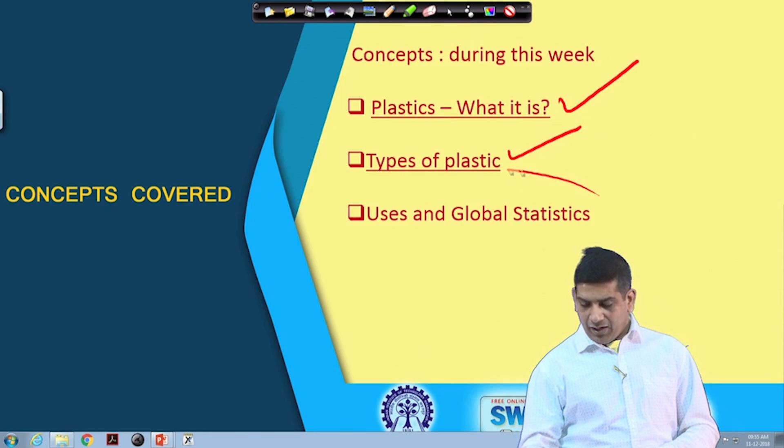Just to recap the concepts we are trying to cover this week: the first two bullets, which are underlined, we have already taken care of. We already talked about what is plastic, and we also looked at the types of plastic. Today, in this video and the one after, we will focus on usage and global statistics.

So let's get started and look at the use and global statistics. What are the major fields where plastic is used? I have told you in the last three videos that plastic is basically used everywhere, but where is the maximum quantity of plastic being used?

Plastic is used in automotive, electrical, electronics, and consumer goods—all sorts of different items that you and I buy. Medical devices—go to any hospital today and you see a lot of plastic related stuff. Construction industry uses a lot of plastic in construction and in tools aiding construction activities. Packaging material uses lots and lots of plastic. If you buy anything from online shopping, or go to any mall and buy lab equipment or other stuff, you see lots of packaging and plastics used there.

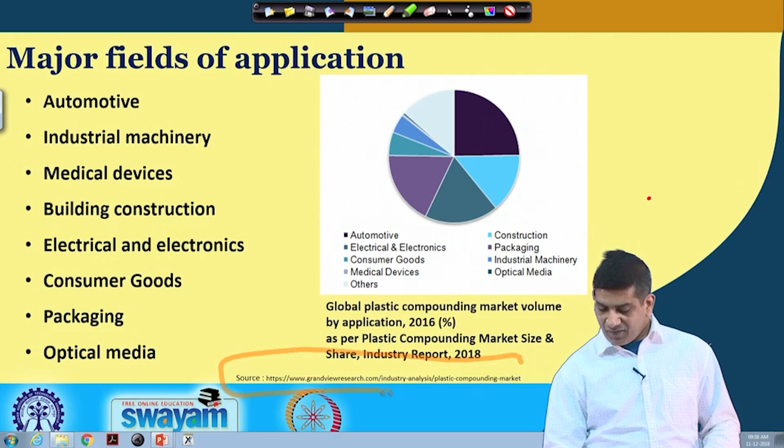The reason for putting this link is twofold, and students here should definitely do it, because this is not my data—I have taken it from somewhere, so I have to indicate the source. That's standard practice in presentations. For lectures, sometimes we can get away without providing the source since I'm just using this information to teach an audience, and it might be okay—though not advisable—if you forget at some point, it can be condoned. But if you are using it for any project, presentation, or seminar, it's a standard global practice that you should list the source.

So that's one aspect of putting the source here. The other aspect is I want you guys to go and look at these sources, because what we are presenting in this course is only a snapshot of that particular report. If you have interest in this topic, please visit this website. These slides will be available to you as part of the lecture material, so go look at those websites and learn more information from there, because not everything can be taught in a course. Especially in these kinds of courses, you will have to do a lot of self learning and find information by yourself.

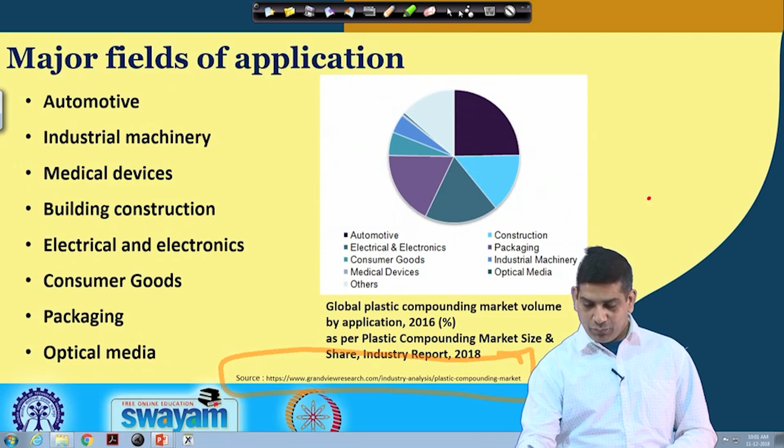If you go and look at your house, and even wherever you are sitting right now, just take a 360-degree look, and you will find lots of plastic products. We are using lots and lots of plastic in our day-to-day applications, and that's the reason why we have been trying to find out how to properly manage these plastics.

These days, the entire bumper is actually plastic. That's why when you go, if God forbid you get into some accident, or while backing up you hit something, you see the whole bumper gets a very big dent. Even with a slight hit with some other object, you get quite a bit of dent, because most of the body of the car is plastic. That's why cars are becoming very light.

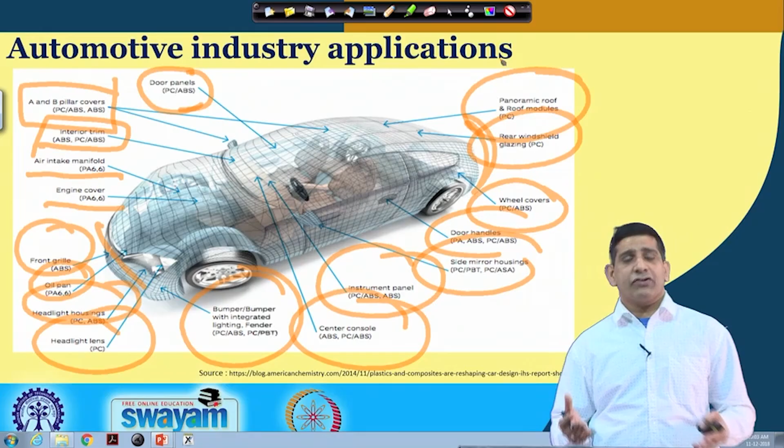So think about your car - wherever you touch the car, there is plastic. That's why we use lots and lots of plastic, and plastic has done a wonderful job in terms of the automotive industry.

Plastic is being used in automotive and has made vehicles much lighter, and lighter means better fuel mileage, because if it's a light car with less weight, you get better fuel mileage. So it helps save on fuel consumption, and that way it helps save fossil fuel consumption - it is actually doing good for the environment that way. So all uses of plastic are not bad.

So when we talk about plastic pollution, we are getting drowned in plastics and all that. Yes, there is plastic. Mismanagement of plastic waste is a problem. Plastic itself is not a problem.

Plastic, when it was invented and the way it is being used today, the reason for that is it's a wonderful material. It has multiple applications, as you saw in the last three videos. It is made in a variety of ways for widespread applications on our day-to-day basis. We use this plastic in lots of industries and our daily usage, consumer products, as you just saw. So plastic has really helped and improved our life.

But at the same time, when it's discarded, it's waste. When it gets into the waste stream, the problem we are having is we are mismanaging the plastic waste. We are not managing the plastic waste properly. That's the issue. The issue is not just the plastic.

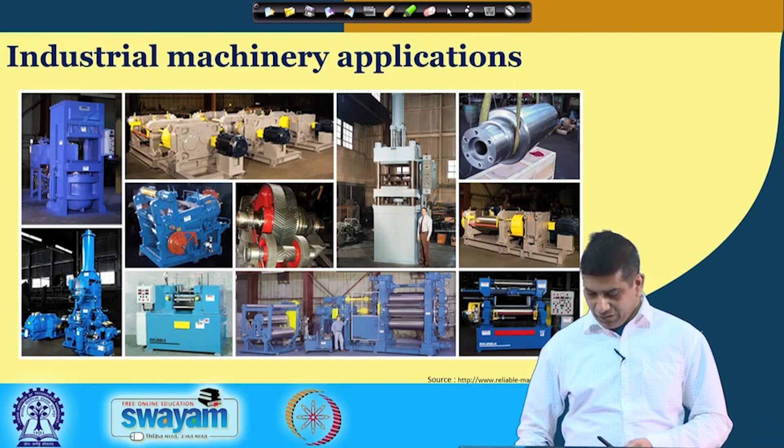So I talked about other areas - medical applications. When you go to a hospital, if you visit somebody, just look around the hospital bed where the patient is recovering from illness or surgery, and you see all those different gadgets attached to the patient, all those tubings.

As you go home today, just look at your medical cabinet. Most of us have some medicine at home, and you will see most of the packaging is plastic only, or a mixture of plastic and some other material. Or if you have containers, you use different types of containers - again a variety of plastics being used. So we use a lot of plastics in medical applications.

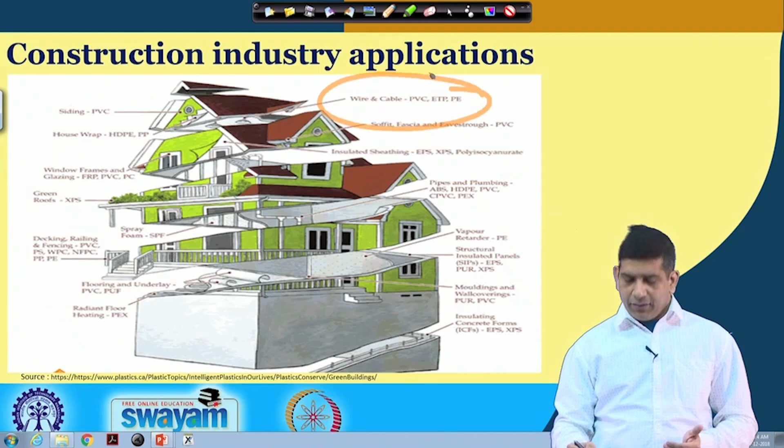Why do they have a slanted roof? Because most of the places there is snow, so the snow will not accumulate on the top, otherwise it will be too heavy. So let the snow go down, and these are mostly single housing or duplex buildings like that. In those kind of construction applications, as you can see, there are wire cables. Even in Indian context we use that. And insulated sheathing, insulation is done using plastic.

Pipes, plumbing is done a lot with plastic. In fact, if you look at the plumbing in India right now for housing, I would say probably, if not close to 100%, 90+% will be plastic only.

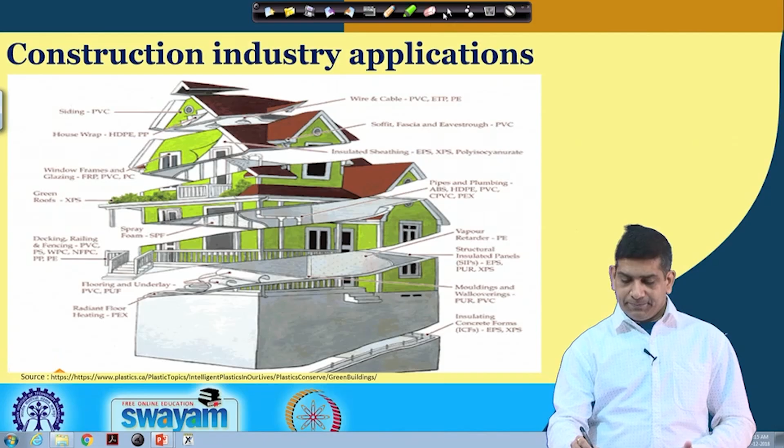We are using lots of plastic. Even the taps, everything is becoming plastic. In terms of some of the other stuff, like vapor retarder, we don't use that much in Indian context. Structural insulation, moldings, insulation from the bottom, flooring using some PVC and other stuffs, decking, sometimes green roofs, window frames, house wraps, HDPE, PP, sidings. So lots of plastic is being used in the construction industry as well. That's what we try to highlight using this particular picture.

Then electrical and electronic applications. You are watching this video either on your mobile phone, your iPad, a laptop, or a desktop, and all of that contains plastic. So you have different types of plastic. Your mobile is becoming lighter - you have a big mobile phone but the weight is not that high. Laptops, we are replacing metals with plastic, so laptops are getting lighter, and same thing with the desktop. Remember the desktop of earlier days when one person would carry the CPU and another would carry the monitor? Now one person can carry the entire unit because it became lighter - the heavier metals were replaced by lightweight plastic. That's the reason plastic is used in almost all electronic products.

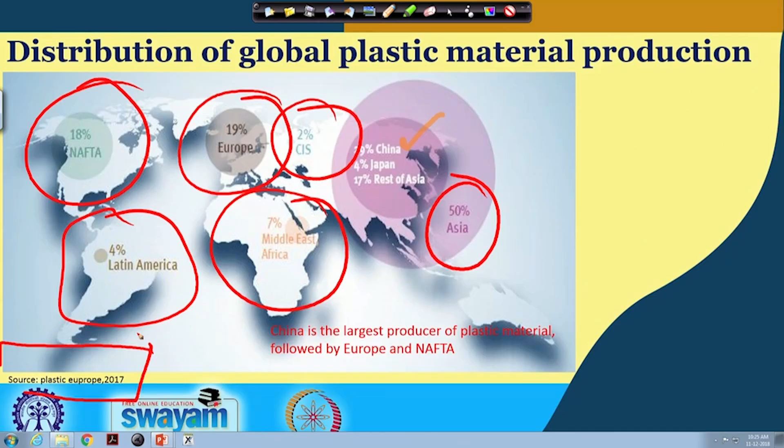We'll carry on in terms of the global statistics now. In this particular video, we talked about the different uses of plastic. Now the last topic for this week is on global production data, which we got into with this slide, and we'll continue our discussion further in the next video. Thank you, and see you again.